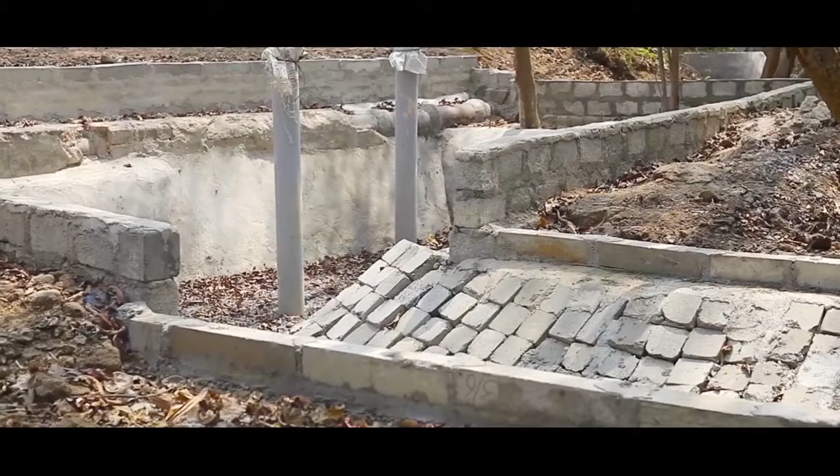Water, water everywhere, not a drop to drink. Isn't this what we feel after the rains? Puddles and water-filled potholes only make us wish that we could make use of the precious water. Actually, we can. Rainwater need not be wasted. Rainwater harvesting is the best way for using the rainwater.

Over the last decade or so, the distribution of rainfall in many parts of the country is erratic and uneven, which causes water scarcity conditions in many parts of the country, due to which water is not sufficient for drinking, household, agriculture, industries, and other purposes. Also, the groundwater levels in many states have been depleting.

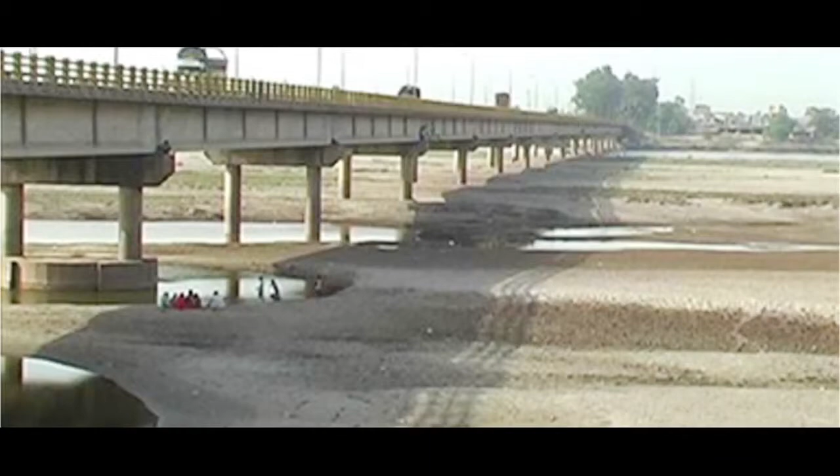We cannot produce water, but one thing is possible, that is to harvest the available rainwater, preserve it, save it, recharge it, conserve it, store it, and use it after proper treatment.

As we are all aware, 18% of the world population is in India, but we have only 4% of water resources. Whereas if you take into consideration the utilization of the water, more than 30% of the water is being utilized in India. This, if you take into account, is a huge utilization in India.

Because of urbanization, industrialization, and explosion of the population, the pressure is on the water resources, more particularly the groundwater resources. Our most huge resource available in the world is groundwater, but utilization day by day is increasing tremendously. The pressure is very high on groundwater.

Because of overutilization of the groundwater resources, there are two kinds of problems arising out of it. One is the declining groundwater levels, and the other is the deterioration in quality of groundwater. Because of these problems, the Ministry of Water Resources, Central Groundwater Board is taking up many artificial recharge structures to control the groundwater level decline and improve the groundwater quality.

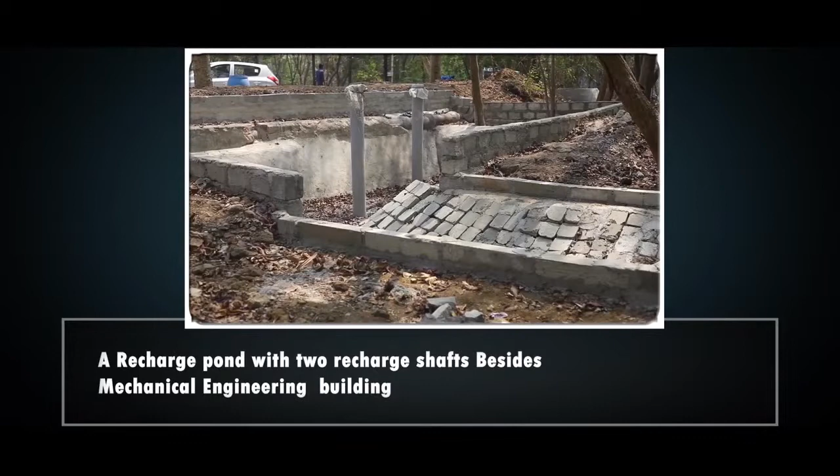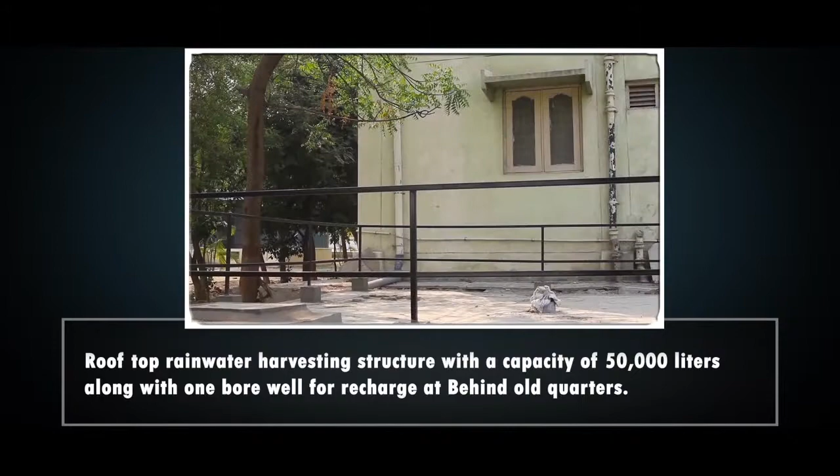Under this project, we have constructed 10 rainwater harvesting structures in the university, including 3 piezometers, which are a recharge pond with 2 recharge shafts beside the mechanical engineering building, a rooftop rainwater harvesting structure with a capacity of 50,000 liters along with 1 borewell for recharge behind the old quarters, and a rooftop rainwater harvesting structure with a capacity of 50,000 liters along with 1 borewell for recharge at the new quarters,

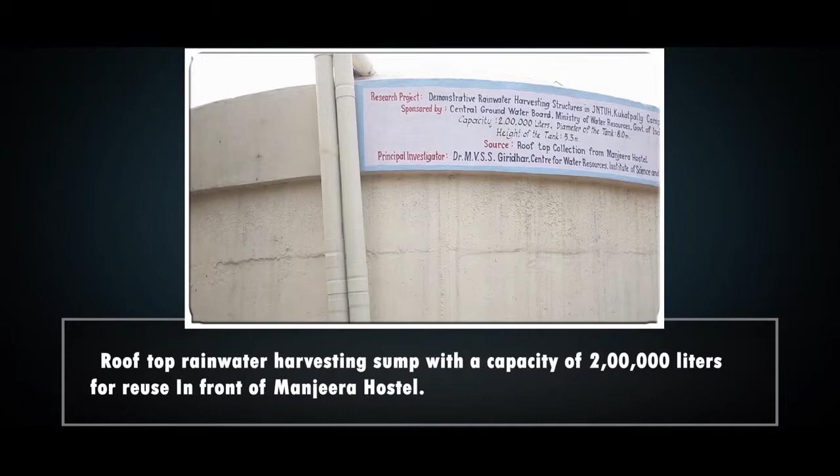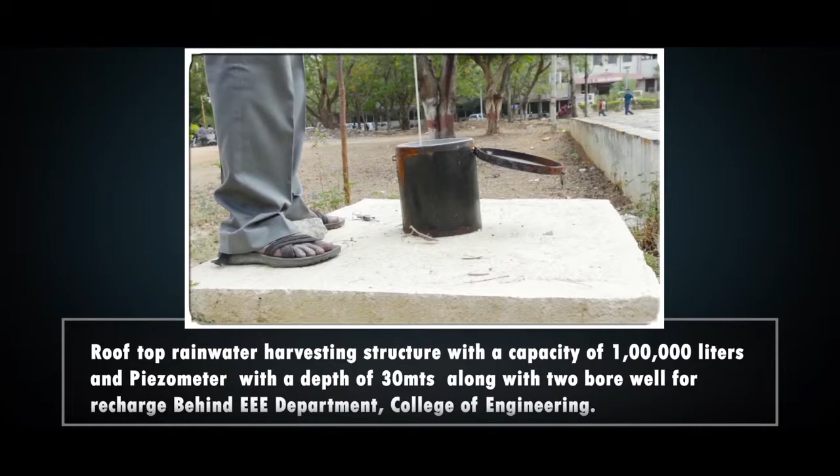a rooftop rainwater harvesting sump with a capacity of 2 lakh liters for reuse in front of Manjeera Hostel, a rooftop rainwater harvesting structure with a capacity of 1 lakh liters and a piezometer with a depth of 30 meters along with 2 borewells for recharge behind the Triple E Department, College of Engineering,

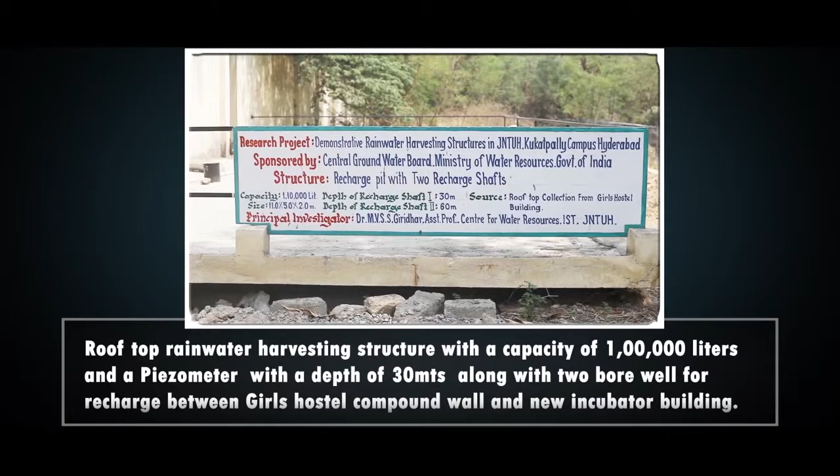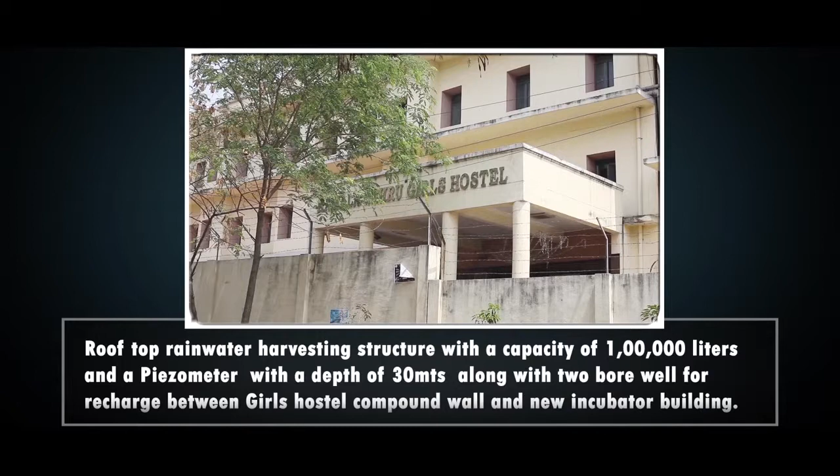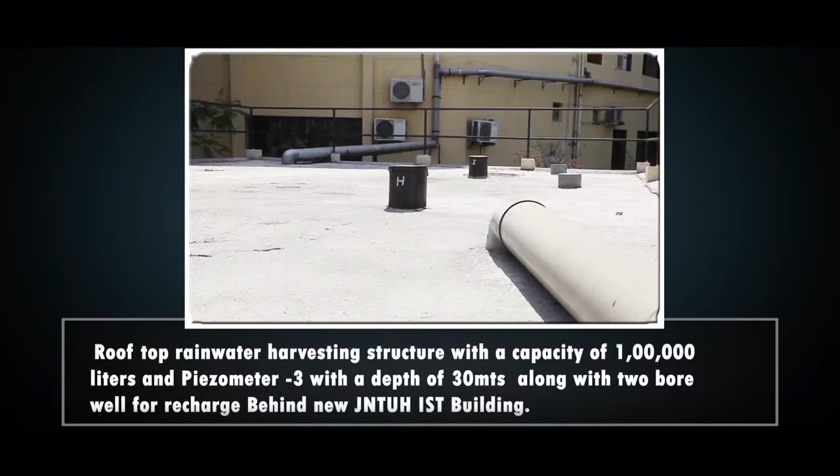a rooftop rainwater harvesting structure with a capacity of 1 lakh liters and a piezometer with a depth of 30 meters along with 2 borewells for recharge between the Girls Hostel compound and the new incubator building, and a rooftop rainwater harvesting structure with a capacity of 1 lakh liters and piezometer 3 with a depth of 30 meters along with 2 borewells for recharge behind the JNTUH IST building.

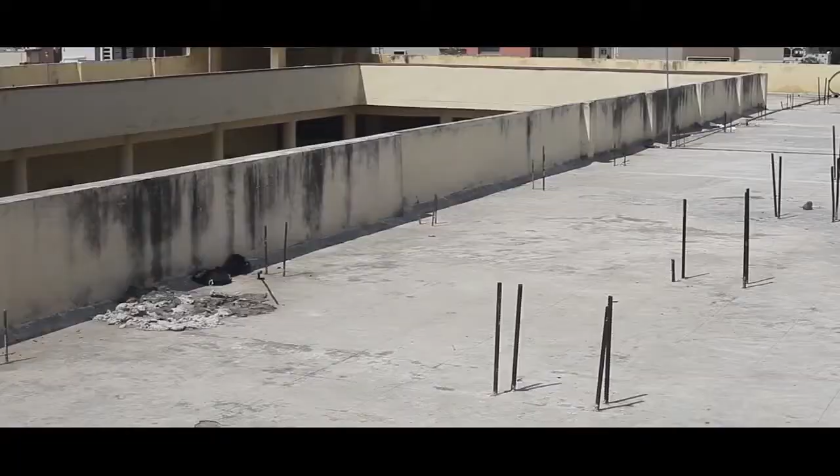Manjeera Boys Hostel. Manjeera Hostel building has a rooftop area of 620 square meters. The rainwater falling on the roof of this hostel is directed to the circular storage tank of 2 lakh liter capacity. The rainwater available from the roof of the building alone is about 4 lakh liters per year. The water is made to flow through PVC pipes of 4-inch and 6-inch diameter into the tank.

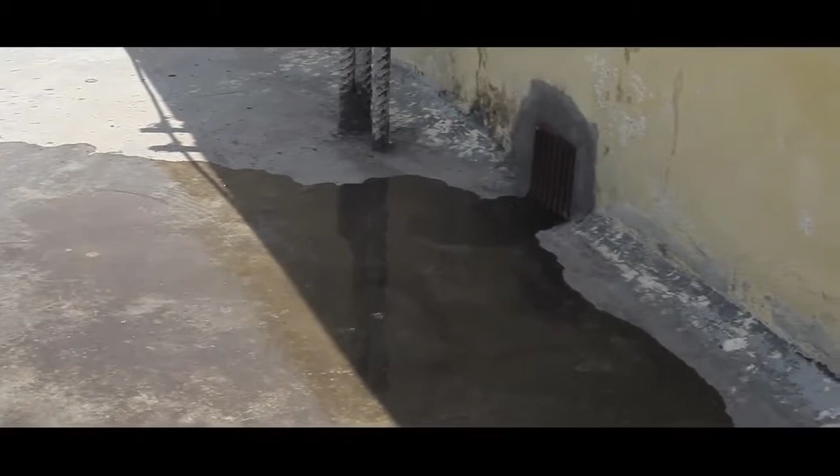Proper filtration system has been made at the inlet point of the storage water tank. The water stored in the tank is used for domestic purposes of the students residing in the hostel. Technical specifications of the 2 lakh liter structure located in front of Manjeera Hostel, JNTUH campus.

Capacity of the tank: 2 lakh liters. Diameter of the tank: 8 meters. Height of the tank: 5.3 meters. Rooftop area: 620 square meters. Maximum rainwater that can be harvested in a year: 4 lakh liters. PVC pipeline used: 4-inch and 6-inch diameter.

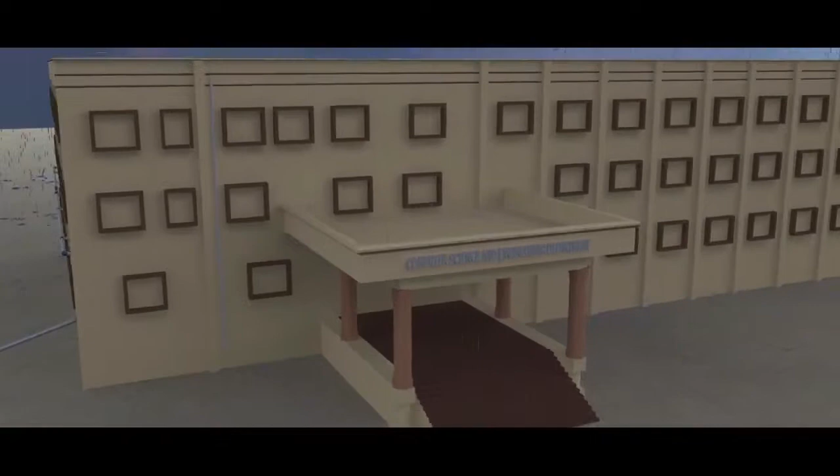Rainwater falling on the roofs of 11 buildings situated in the university campus is collected through PVC pipes of different diameters through telescopic design. After proper filtration, water is allowed to store in the sumps. In each structure, recharge wells are established in the sumps to inject water into confined and unconfined aquifers directly.

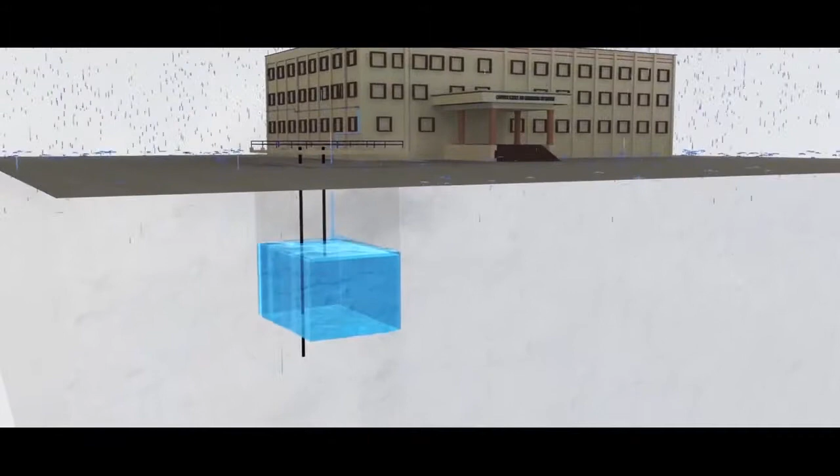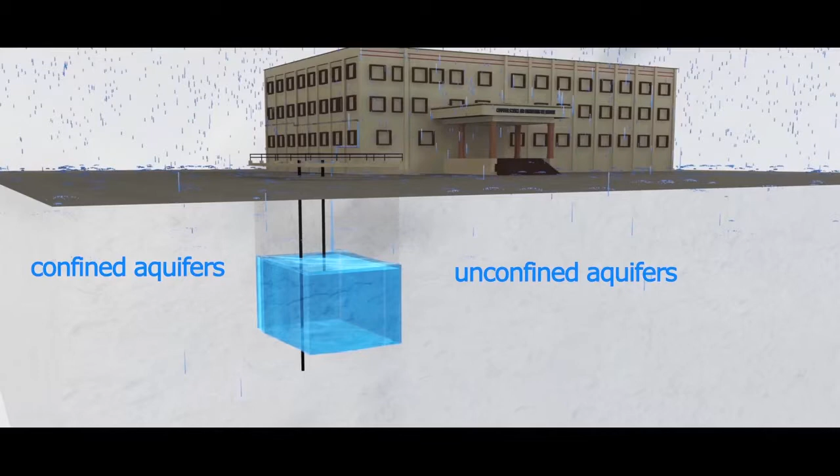The diameter of the recharge shaft is 200 mm. These wells are used to recharge both confined and unconfined aquifers situated at various depths below the ground surface. These recharge shafts are more beneficial for deep depleted aquifers and also where economy of space is an important criterion.

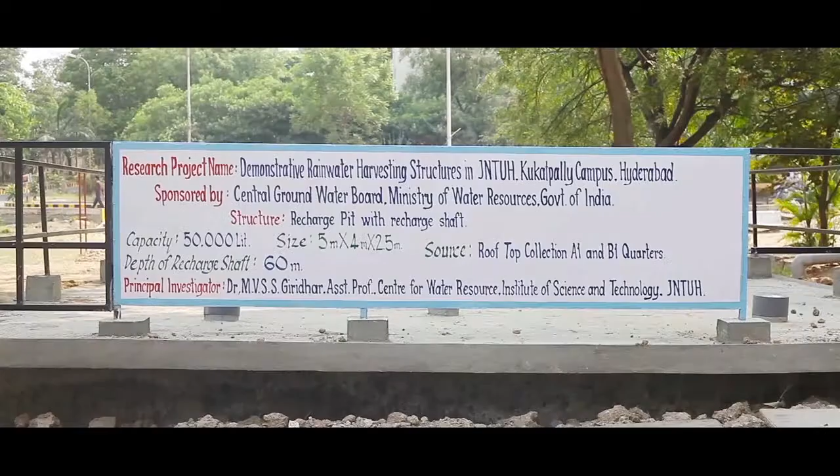A total of 5 rainwater harvesting structures were established in the campus in Phase 1 and Phase 2 of the project for recharge purposes. The technical details about these structures are explained in the following video.

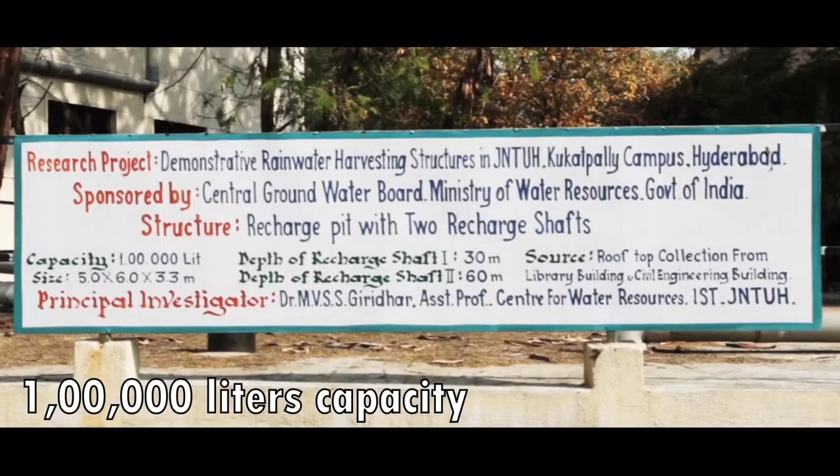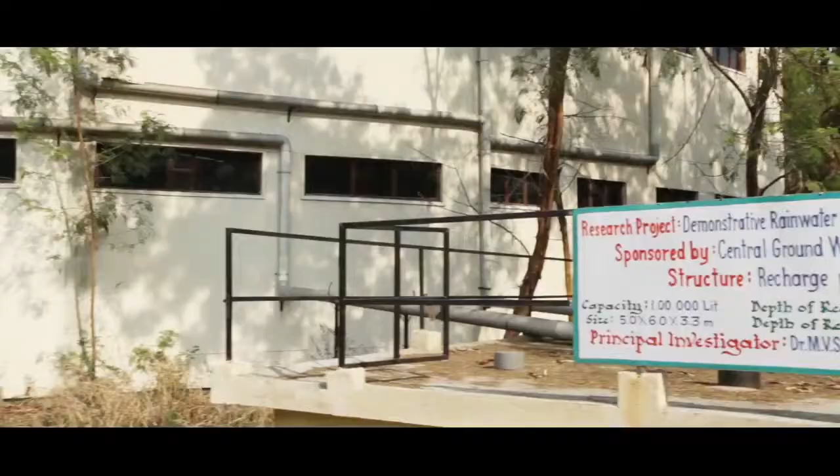Recharge structure with a capacity of 1 lakh liters along with 2 recharge shafts in the tank for percolation, located behind the EEE department, College of Engineering JNTUH, which covers the rainwater coming from the Civil Engineering and Library buildings. Total rooftop area is 1020 square meters. The rainwater available from the roof of these buildings is about 6.60 lakh liters per year.

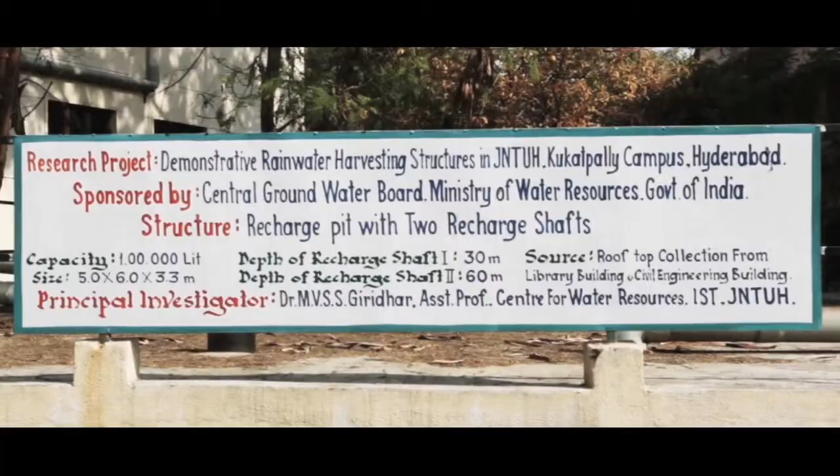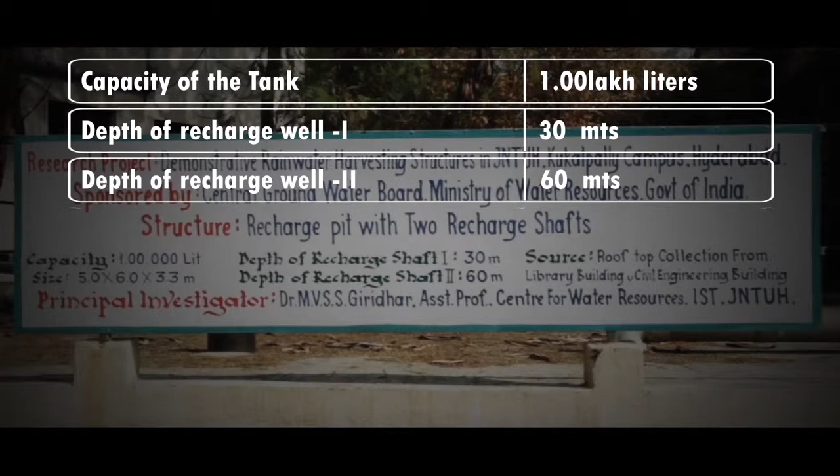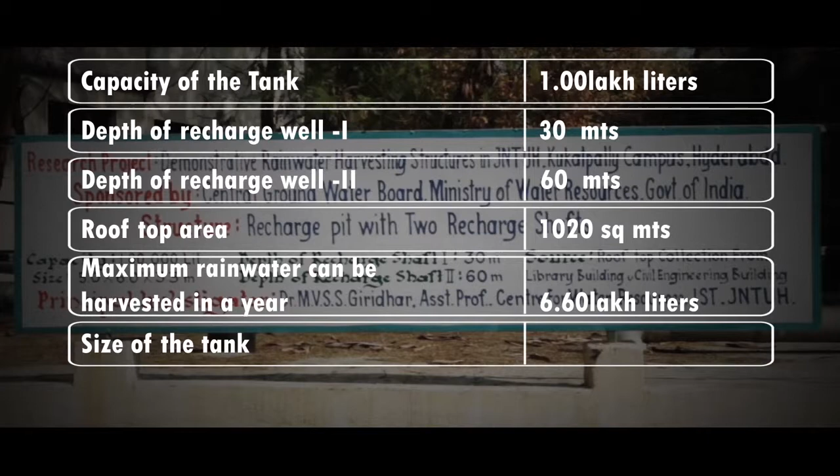Technical specifications of the 1 lakh liter structure located behind the EEE building. Capacity of the tank: 1 lakh liters. Depth of recharge well 1: 30 meters. Depth of recharge well 2: 60 meters. Rooftop area: 1020 square meters. Maximum rainwater that can be harvested in a year: 6.60 lakh liters. Size of the tank: 5 meters by 6 meters by 3.3 meters. PVC pipeline used: 4-inch and 6-inch diameter.

Recharge structure with a capacity of 1 lakh liters along with 2 recharge shafts in the tank for percolation between the Girls Hostel compound wall and the new incubator building JNTUH, which covers the rainwater coming from the Girls Hostel building. Total rooftop area is 1282 square meters. The rainwater available from the roof of the building is about 8.30 lakh liters per year. Stages of construction.

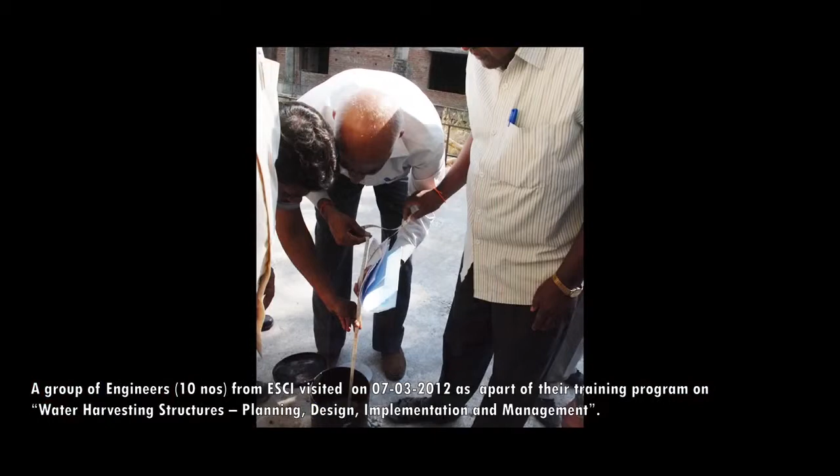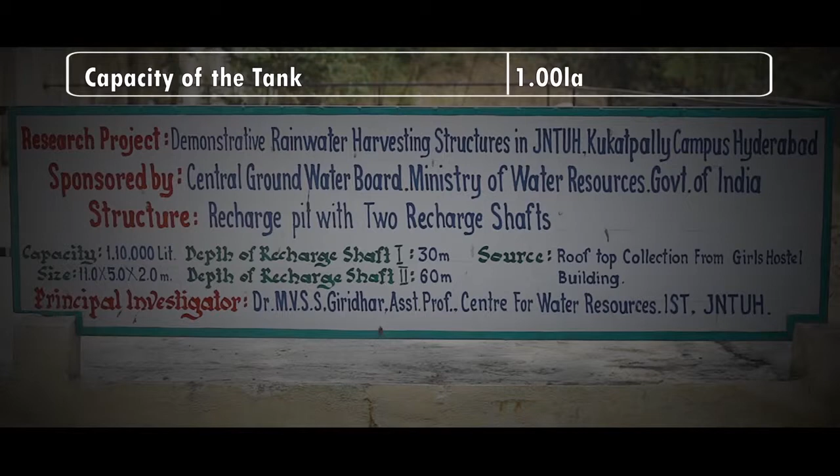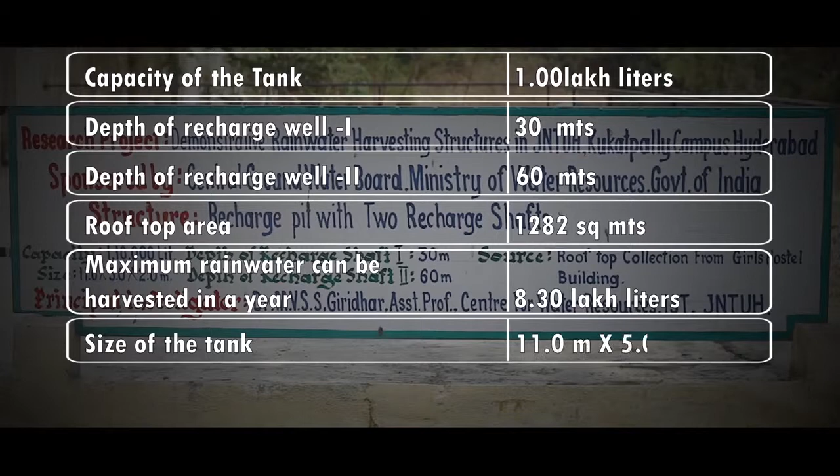Technical specifications of the 1 lakh liter structure located between the Girls Hostel compound wall and the new incubator building. Capacity of the tank: 1 lakh liters. Depth of recharge well 1: 30 meters. Depth of recharge well 2: 60 meters. Rooftop area: 1282 square meters. Maximum rainwater that can be harvested in a year: 8.30 lakh liters. Size of the tank: 11 meters by 5 meters by 2 meters. PVC pipeline used: 4-inch and 6-inch diameter.

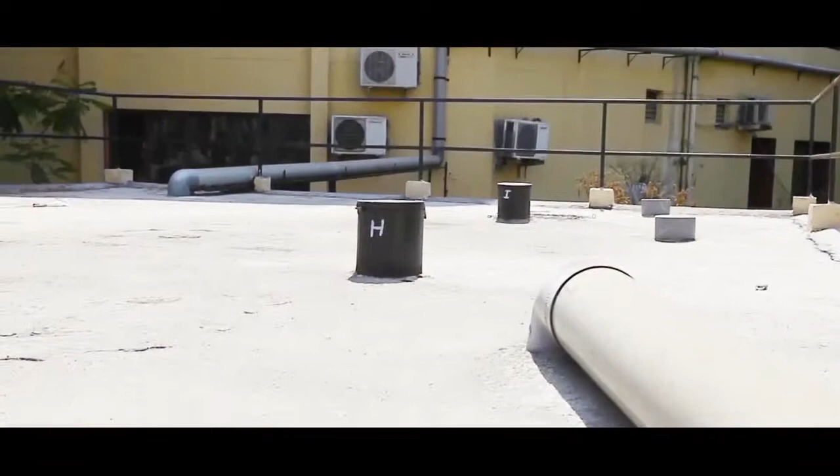Recharge structure with a capacity of 1 lakh liters along with 2 recharge shafts in the tank for percolation between the New Institute of Science and Technology building and the Computer Science Engineering building JNTUH, which covers the rainwater coming from the IST and CSE buildings. Total rooftop area is 681 square meters. The rainwater available from the roof of these buildings is about 4.50 lakh liters per year.

Technical specifications of the 1 lakh liter structure located between the New Institute of Science and Technology building and the Computer Science building. Capacity of the tank: 1 lakh liters.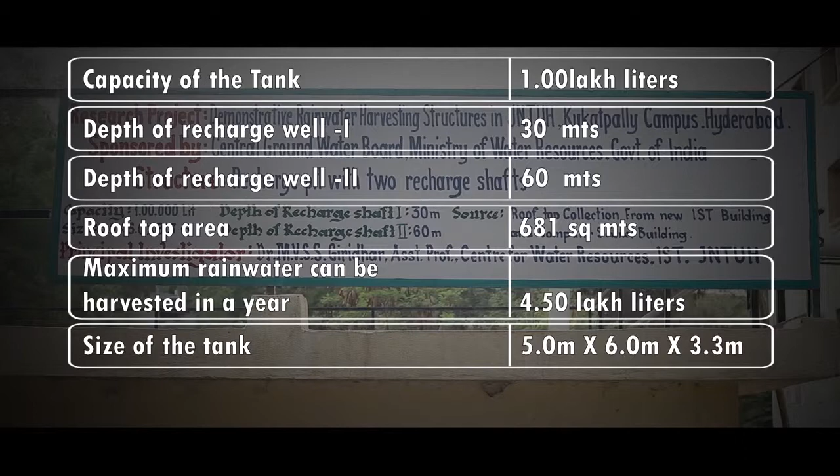Depth of recharge well 1: 30 meters. Depth of recharge well 2: 60 meters. Rooftop area: 681 square meters. Maximum rainwater that can be harvested in a year: 4.50 lakh liters. Size of the tank: 5 meters into 6 meters into 3.3 meters. PVC pipeline used: 4 inch and 6 inch diameter.

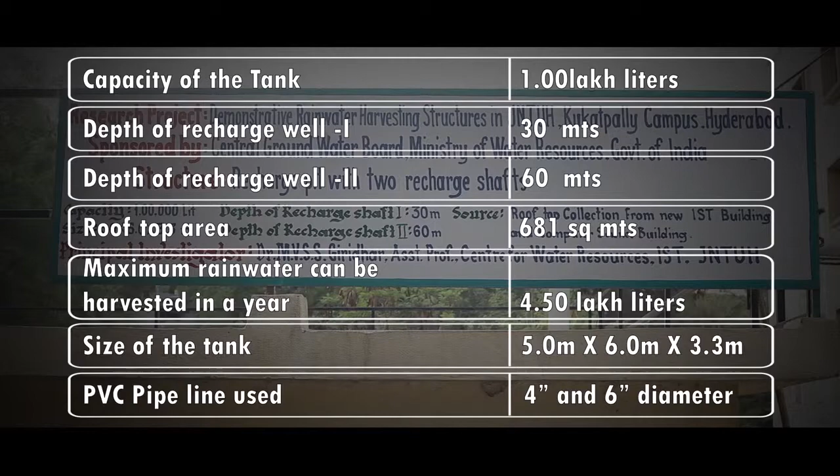A recharge structure with a capacity of 50,000 liters along with one recharge shaft in the tank for percolation is located between new quarters JNTUH, which covers the rainwater coming from the B5, A3, RSQ1 and RSQ2 quarter buildings. Total rooftop area is 2216 square meters. The rainwater available from the roof of these buildings is about 14.36 lakh liters per year.

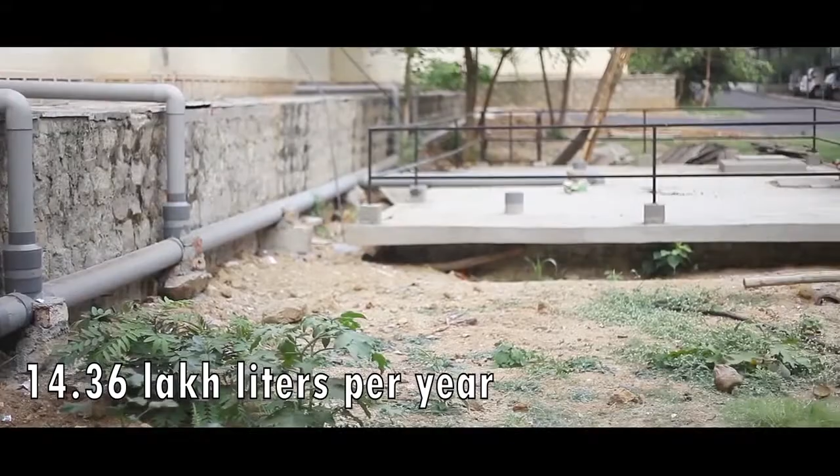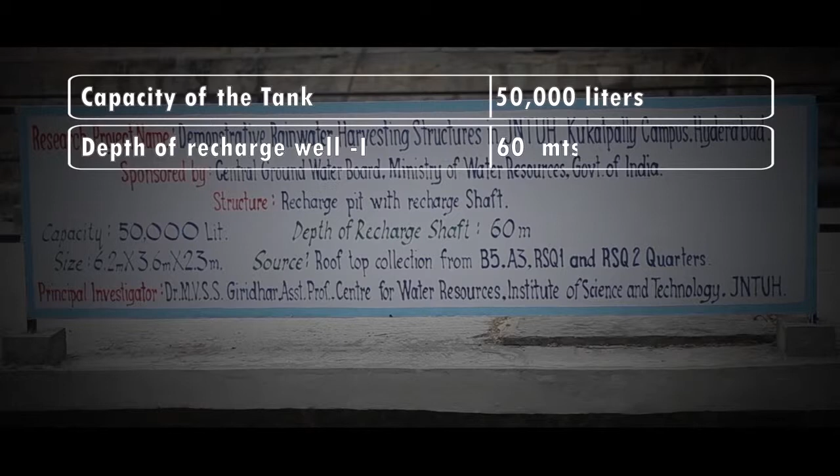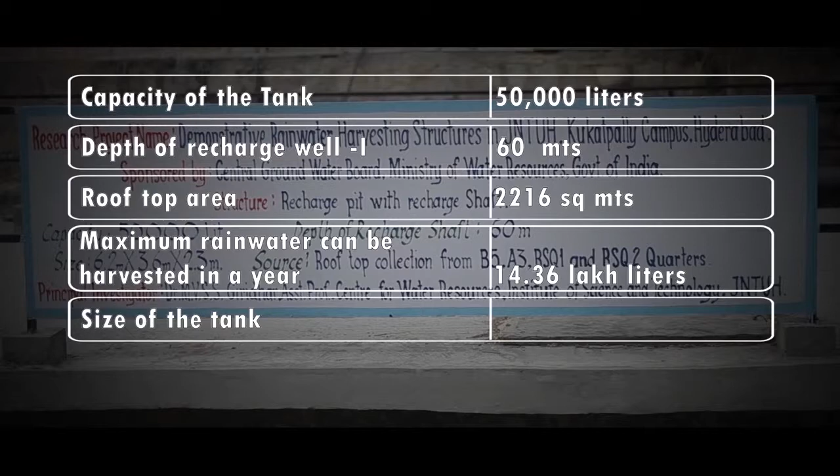Technical specifications of the 50,000 liter structure located behind new quarters JNTUH. Capacity of the tank: 50,000 liters. Depth of recharge well 1: 60 meters. Rooftop area: 2216 square meters. Maximum rainwater that can be harvested in a year: 14.36 lakh liters. Size of the tank: 6.2 meters into 3.6 meters into 2.3 meters. PVC pipeline used: 4-inch and 6-inch diameter.

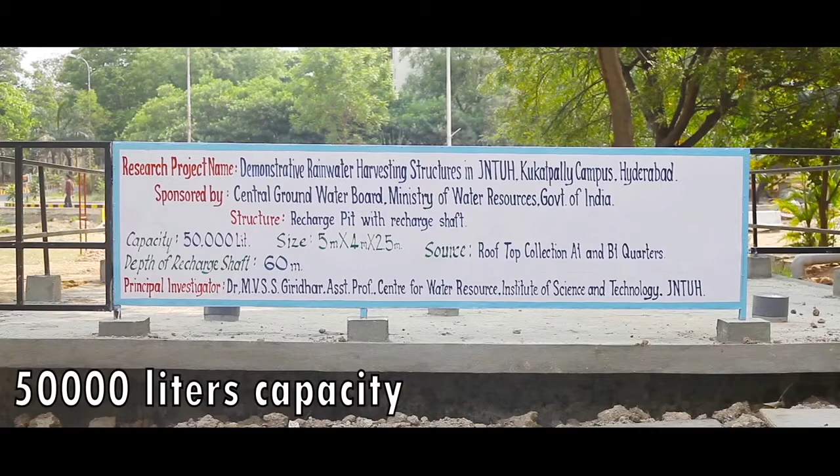A recharge structure with a capacity of 50,000 liters along with one recharge shaft in the tank for percolation is located between old quarters JNTUH, which covers the rainwater coming from the A1 and B1 quarters buildings. Total rooftop area is 975 square meters. The rainwater available from the roof of these buildings is about 6.50 lakh liters per year.

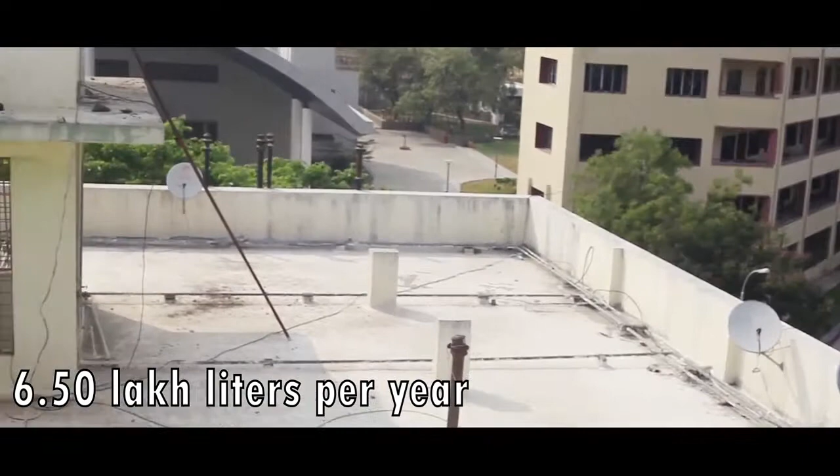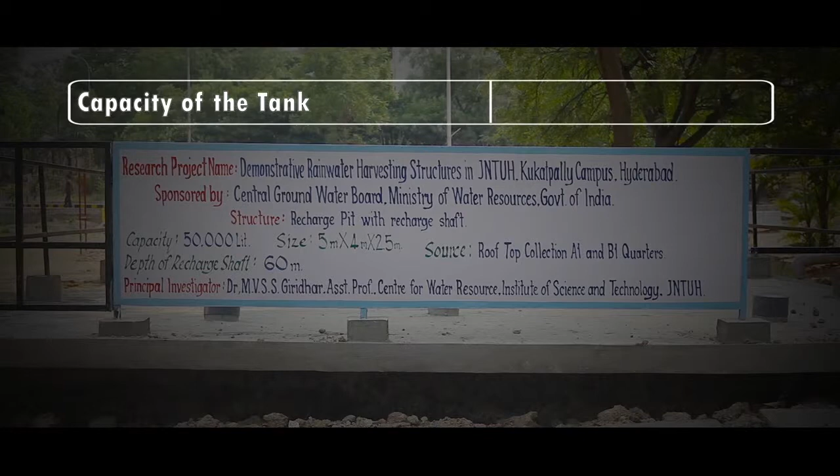Technical specifications of the 50,000 liter structure located behind old quarters JNTUH. Capacity of the tank: 50,000 liters. Depth of recharge well 1: 60 meters. Rooftop area: 975 square meters. Maximum rainwater that can be harvested in a year: 6.50 lakh liters. Size of the tank: 5 meters into 4 meters into 2.5 meters. PVC pipeline used: 4-inch and 6-inch diameter.

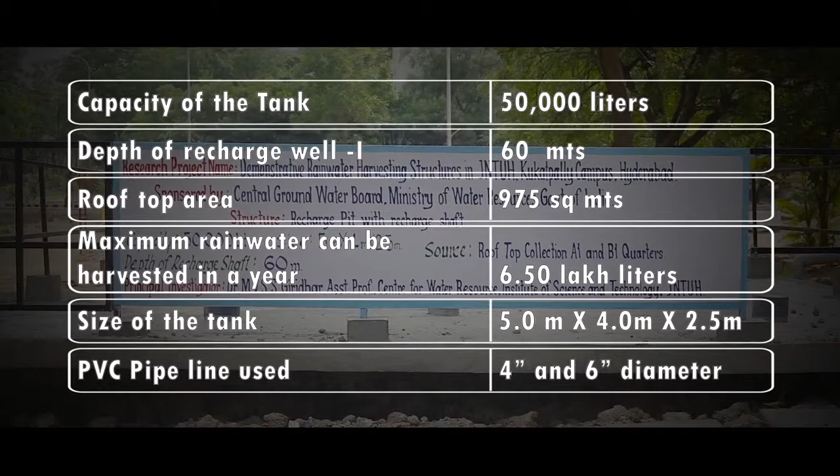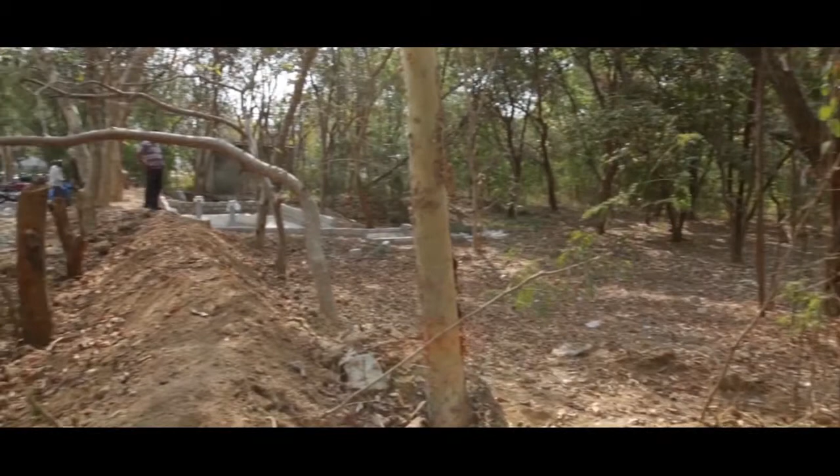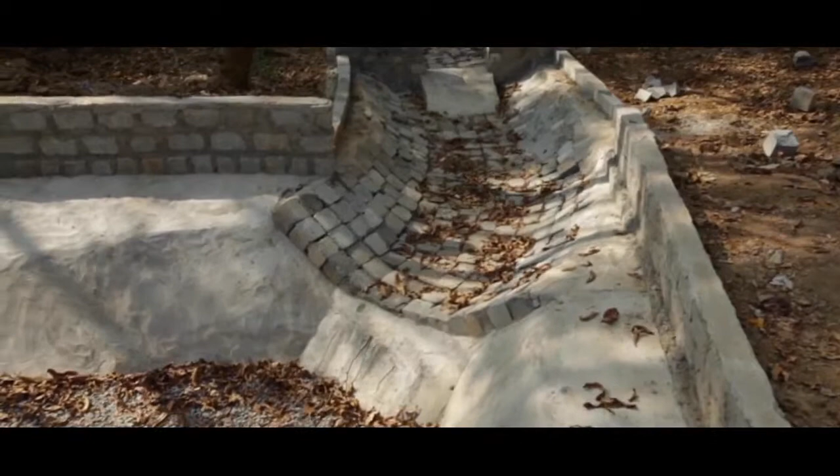There are 3 distinct watersheds covering JNTUH campus from which surface runoff is harvested for recharging the groundwater aquifers. A recharge pond with silt trap, inlet and outlet is constructed near the Mechanical Engineering Department. A filtration bed is provided at the bottom surface of the pond. Rainwater will enter into the recharge shaft after proper filtration through filter media. 2 recharge shafts are also established within the recharge pond. The diameter of the recharge shaft is 6 inch. These wells are helpful in recharging aquifers at various depths below the ground surface.

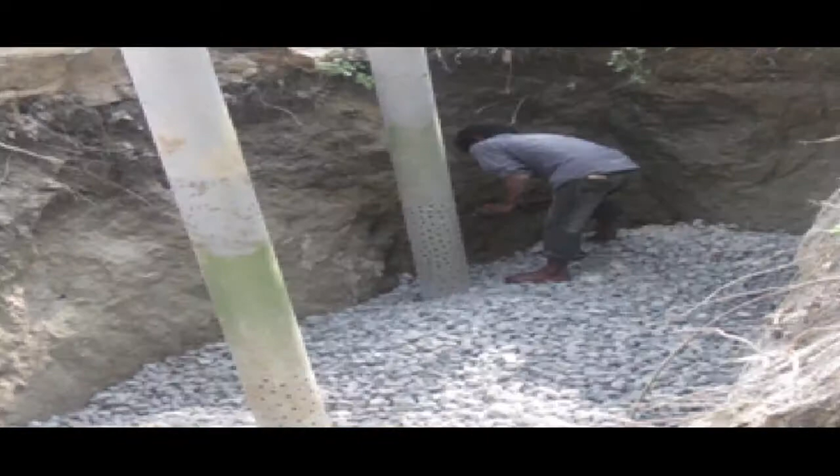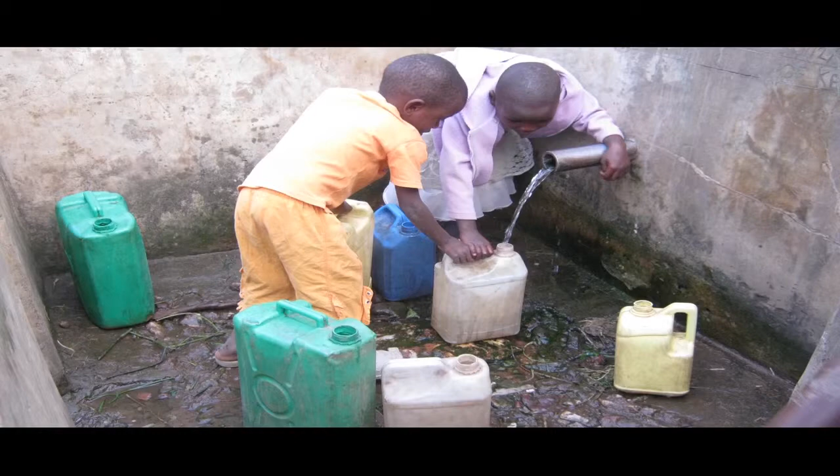All the above rainwater harvesting structures have been funded by the Ministry of Water Resources, New Delhi, Government of India through the Central Groundwater Board Southern Region, Hyderabad, under the Central Sector Scheme, Groundwater Management and Regulation. All the rainwater harvesting structures constructed under this scheme are currently functioning at the JNTU University campus, one of many measures taken by the organization to create awareness about the conservation of rainwater. This is an important step in the right direction. Conservation of water is essential not only for the present but also for our future. Water is our lifeline. Remember, catch every drop of water when it falls on a rainy day.

The JNTUH authorities are monitoring the quality and quantity of groundwater in the campus. With the existing rainwater harvesting structures, we can collect around 75 lakh liters of rainwater in any normal rainfall year. Last year, after completion of the structures, we collected about 26 lakh liters of rainwater. The JNTUH authorities have collected 4 lakh liters of rainwater and used it for the students of Manjeera Hostel.

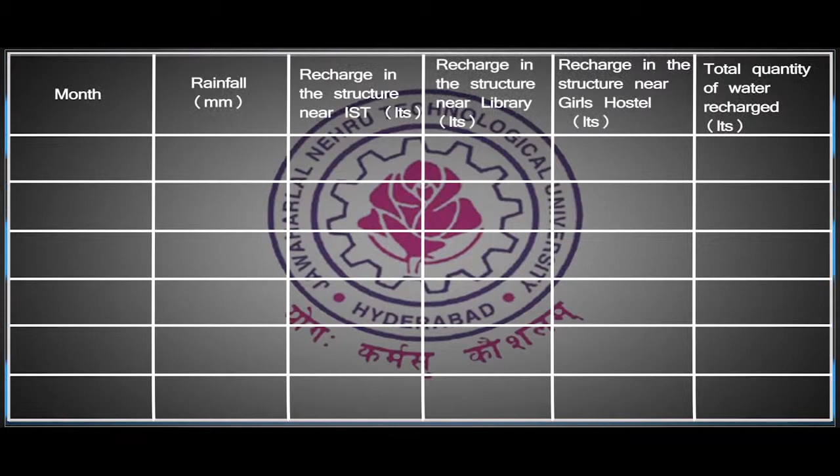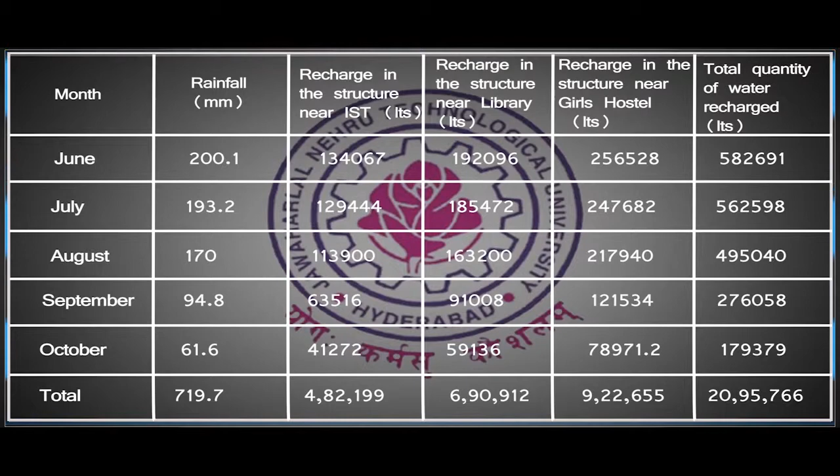The authorities have observed a 7.5 meter rise in the static groundwater level in the piezometers at different locations in the campus. Water levels measured in the 3 borewells on a daily basis during the monsoon period were found to be 22.6, 23.6, and 10.1 meters on 15 June 2012, and the corresponding water levels improved to 14.63, 16.46, and 3.35 meters respectively on 1st October 2012. A corresponding rise of 7.97, 7.14 and 6.75 meters in groundwater levels has been registered, indicating significant improvement of groundwater levels. The monthly recharge in the structures of JNTUH campus due to rainwater harvesting is as follows. Monthly use of harvested rainwater through the recharge structure at JNTUH campus.

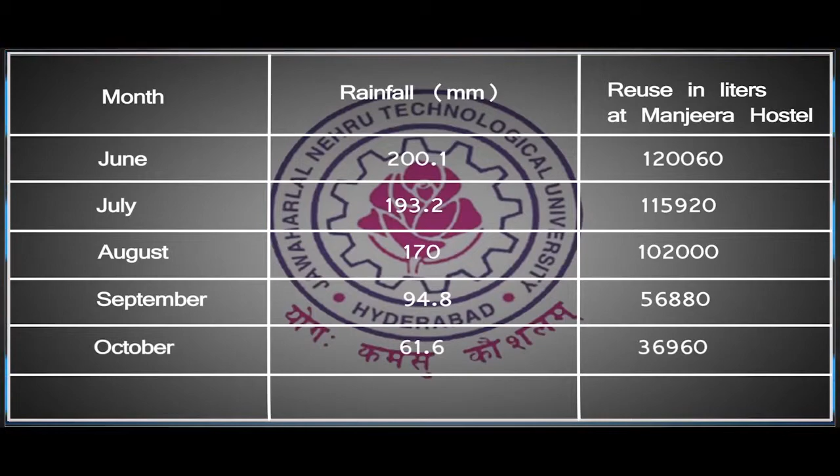I am specially thankful to the Ministry of Water Resources, New Delhi, for funding this project. I personally thank all the officers of the Central Groundwater Board, Southern Region, Hyderabad, for their continuous technical support and approvals. Special thanks to Dr. Varadarajas, Member, Central Groundwater Board, Sri G. Sudarshan, Regional Director, Central Groundwater Board, Dr. P. N. Rao, Superintending Hydrogeologist, CGWB, Hyderabad.

I thank our Honorable Vice Chancellor, Professor Rameswar Rao, Rector, Professor E. Saibaba Reddy, Registrar, Professor N. V. Ramana Rao, Director, Academic and Planning, Professor G. K. Viswanath, Director, IST, Professor K. Mukkanti, Head Center for Water Resources, Professor K. Ram Mohan Reddy, and all other officers, teaching staff and students for their constant encouragement and support throughout the implementation of the project. Without their support, the project may not have turned out in this shape. Thank you.